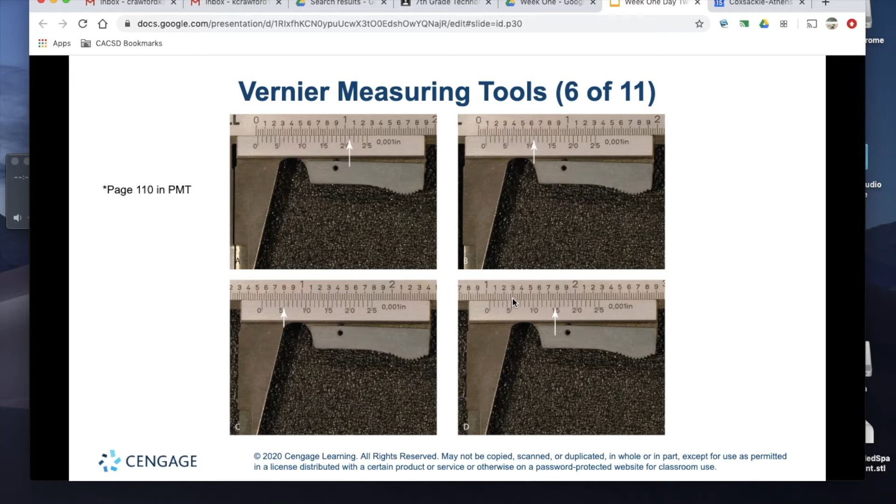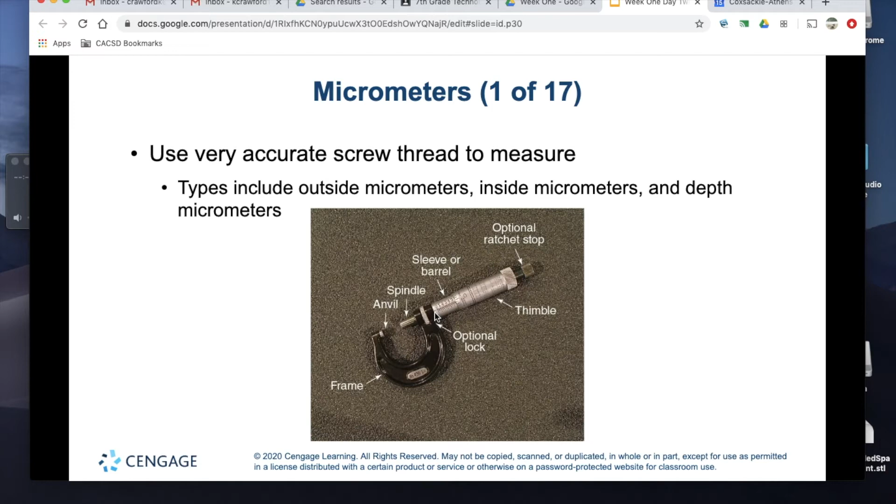We have several different sizes of micrometers, everything from 0 to 1 inch, all the way up to 6 to 12 inches.

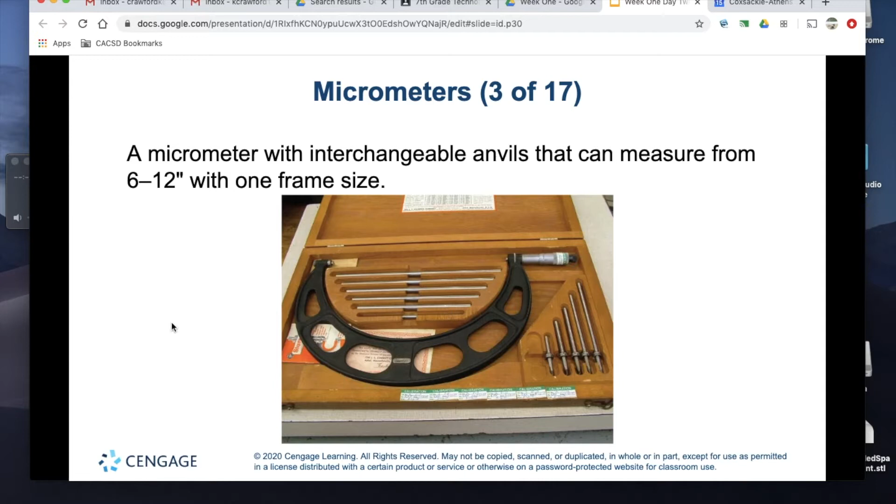Now, taking a look at how we measure with a micrometer, what we're going to do first is find everything before that edge of the thimble. That leading edge of the thimble, we're going to take a look at all the numbers that occur before that. So in this case, it appears that we have 0, 1, 200 thousandths showing on the barrel.

And then we're going to go down similarly as we looked at the vernier scale. We have 25 thousandths increments. So it looks like we have 25, 50, 75 thousandths showing before the thimble. So we have 275 thousandths so far.

And then the next thing that we're going to do is take a look at the thimble and find the line on the thimble that best lines up with the center line on the barrel. In this case, it looks to be about 10 thousandths. So we have 285 thousandths.

Now, in this case, on this micrometer example, we also have a vernier scale that is up above that main scale. And in this case, we have 8 ten-thousandths showing. So we have 285 and 8 tenths as our measurement.

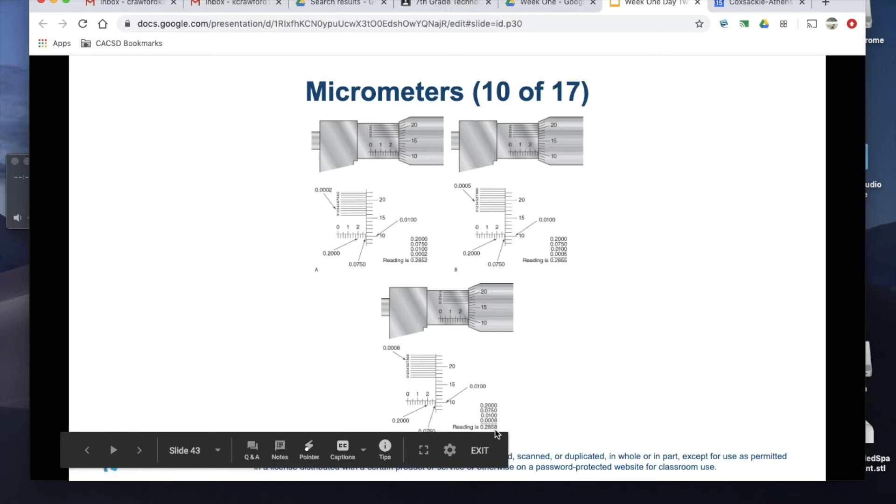Moving ahead, different types of micrometers, and moving to dial calipers. So we took a look at the vernier scale. Now we have dial calipers. Again, we're going to be looking for everything that occurs before the sliding jaw of the caliper.

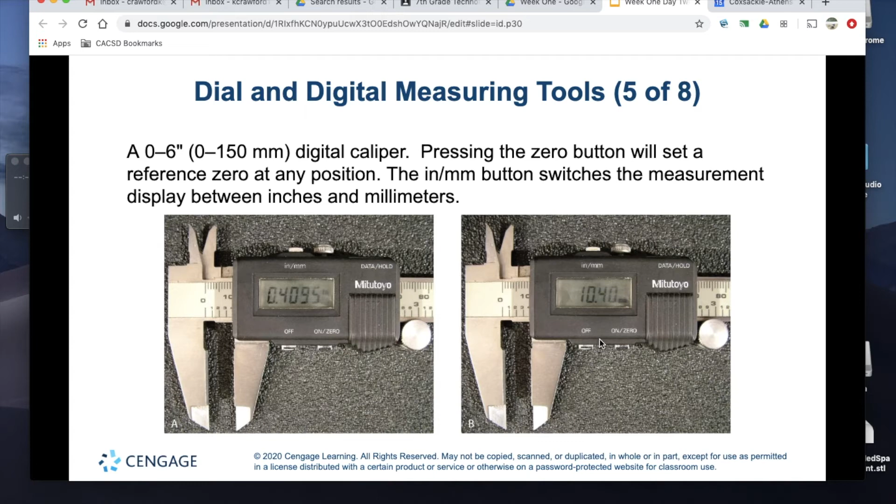Digital calipers, pretty straightforward and easy. The nice thing about digital is you can swap back and forth between inches and millimeters, and they're obviously much quicker to measure with. Dial and digital height gauges, depth gauges.

Then we have some transfer tools, some precision transfer tools. Now, the advantage of these is that we can get to different features that a micrometer or a caliper can't, but they do not have graduated scales on them, so they're just a transfer or a reference tool.

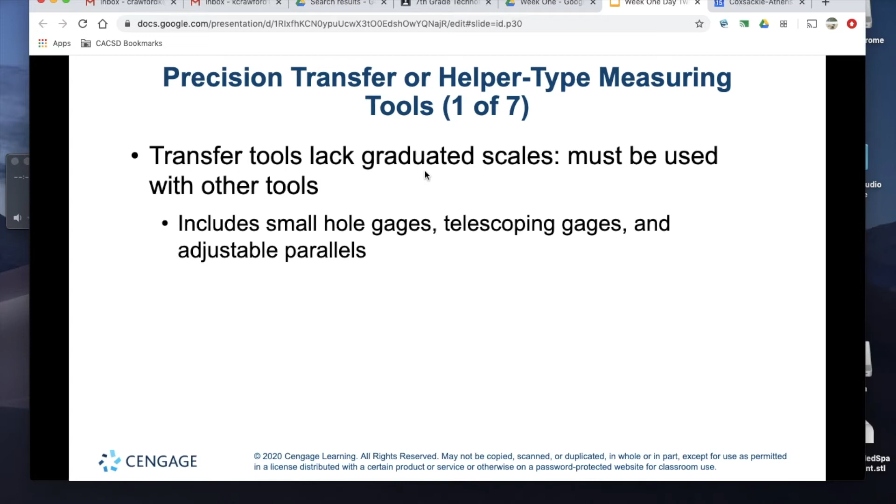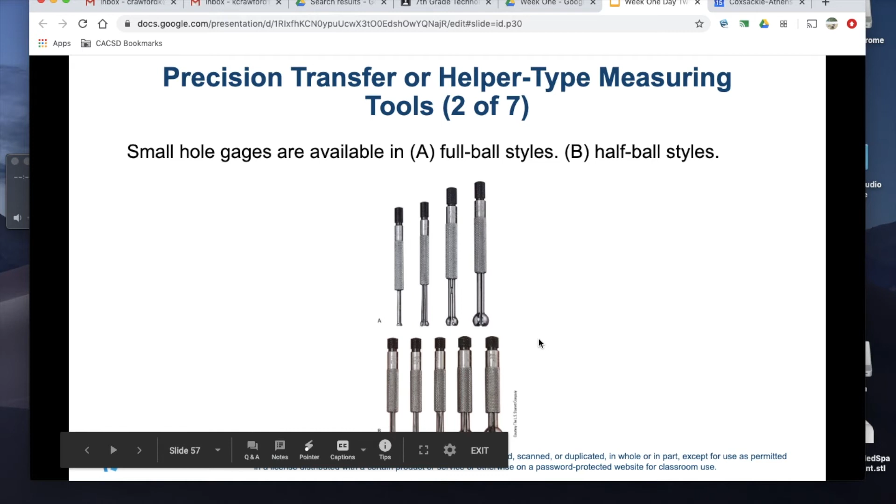So if we take a look at a couple different types here, we have full ball and half ball style gauges. These are for measuring hole diameters.

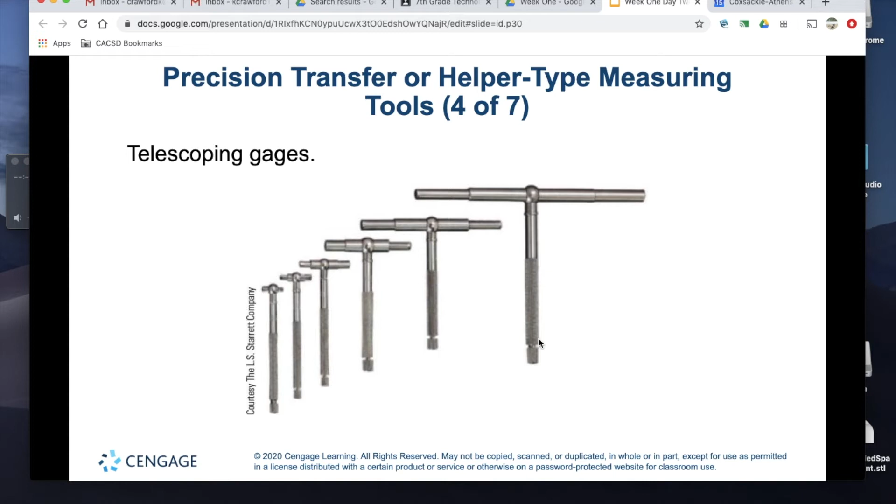We also have telescoping gauges, which most of you should be familiar with. Now, the process of measuring with a telescoping gauge is pretty straightforward.

We're going to insert the telescoping gauge into the hole at a slight angle with the thumb screw slightly tight. We're going to rotate that handle downward, collapsing the gauge in on itself. We're going to tighten the thumb screw of the gauge completely, and then rotate the telescoping gauge and pull it out and measure that gauge with a micrometer.

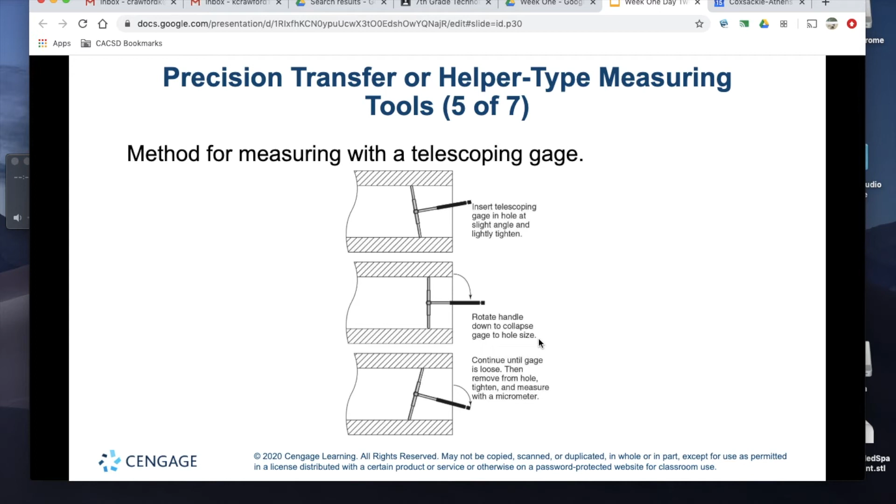Now, take note of how this person is holding on to the micrometer and the telescoping gauge. You gotta have a little bit of dexterity here, but holding the micrometer and the telescoping gauge in this manner allows you to move the thimble, hold on to the telescoping gauge, and hold on to the frame of the micrometer.

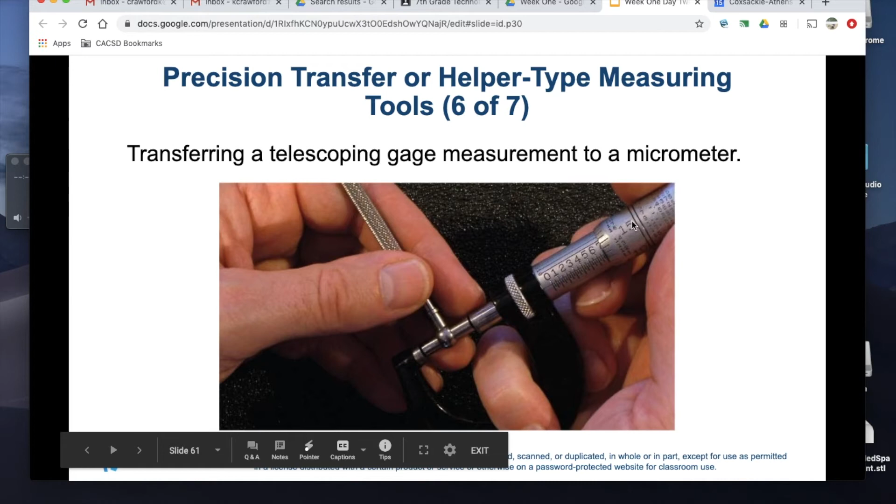Moving ahead here, we have dial and digital indicators coming in two different styles, with a plunge style and a test indicator.

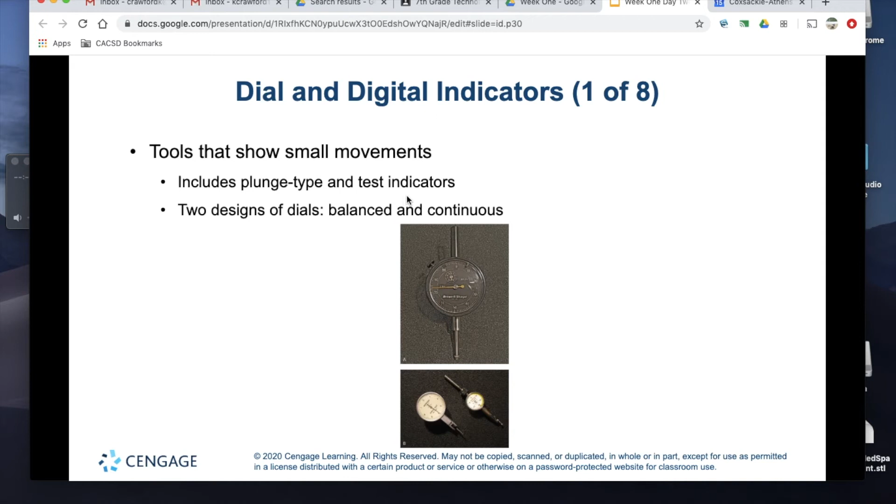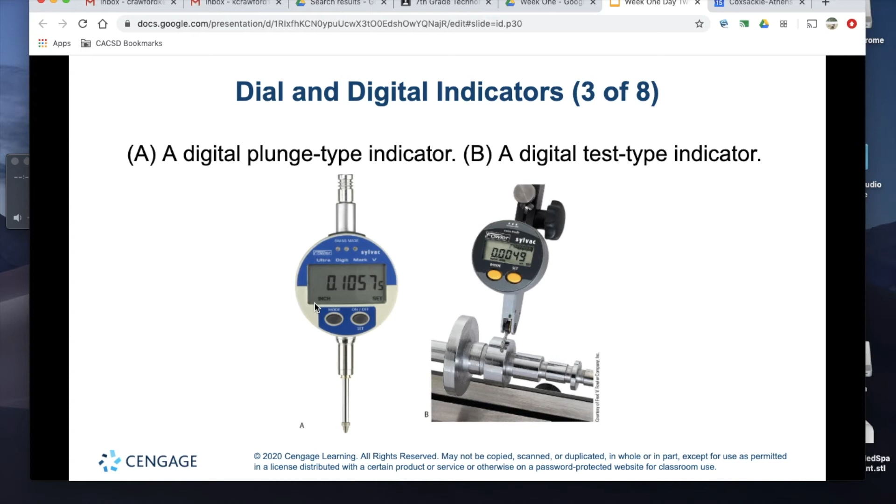Note in this diagram the correct way to set up a test indicator. Note that we have a little bit of preload on the end of the indicator, putting a little bit of pressure on that needle so it's not perfectly vertical.

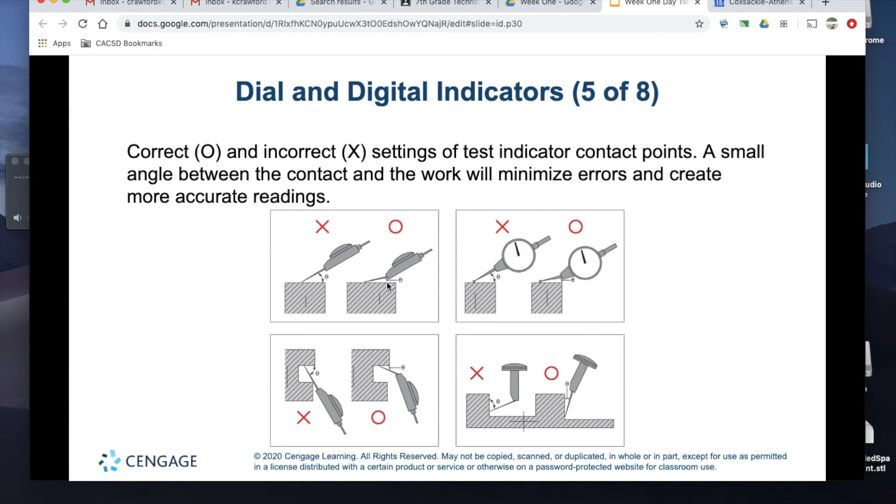We can use dial indicators as a reference. So in picture A, we're using a gauge block stack up to zero out the indicator, and then we can slide our part underneath to see how far out of spec that part might be.

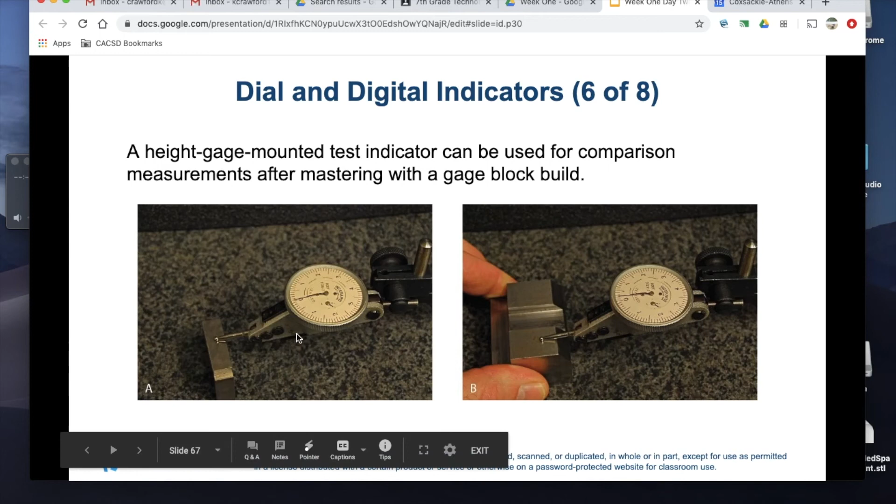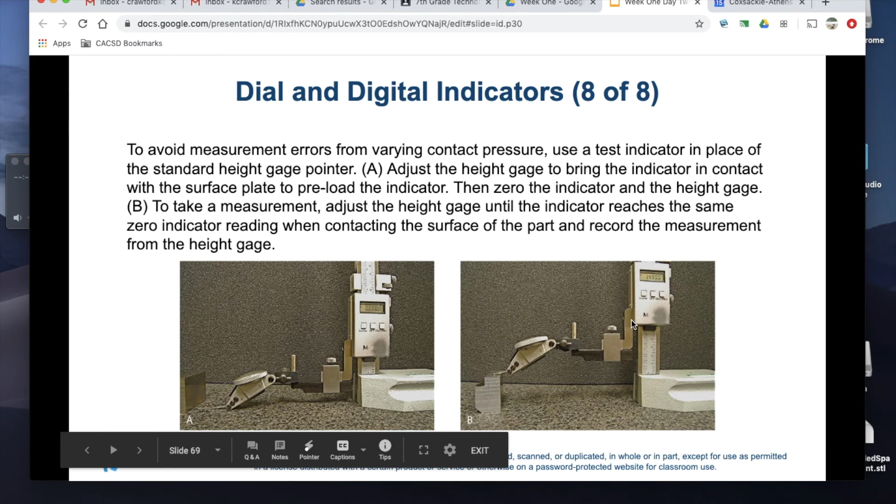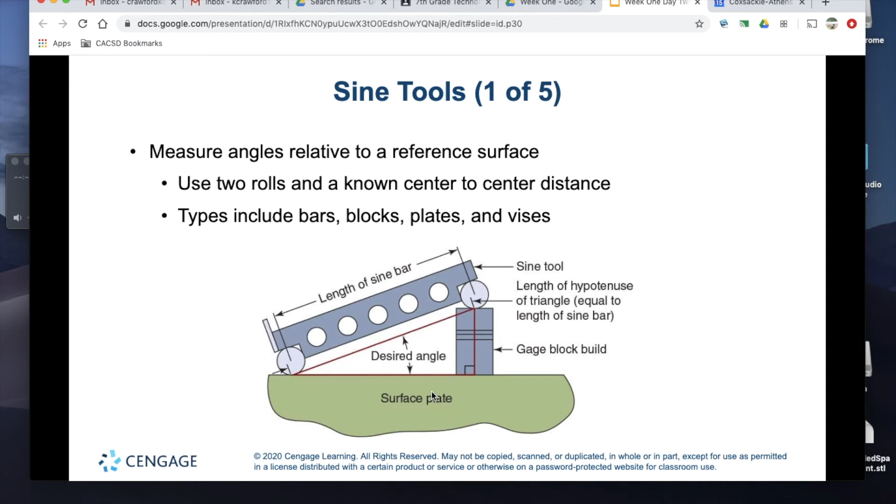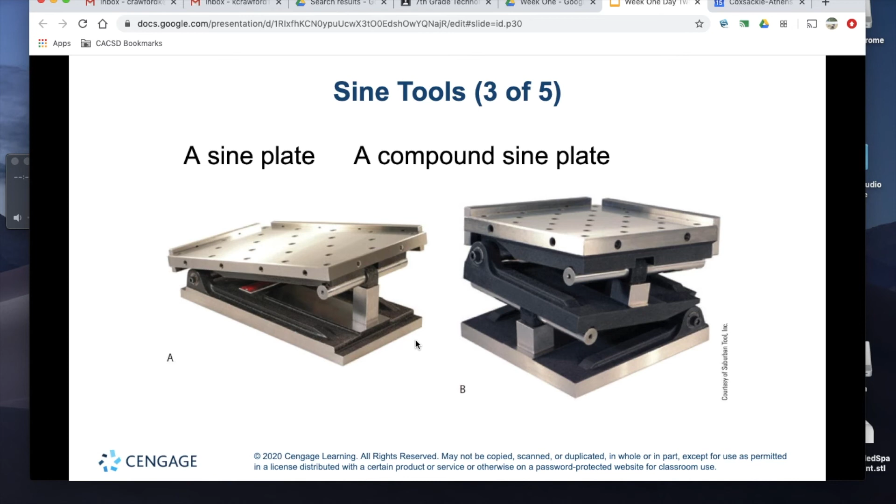Sine bars and sine blocks. A sine block, obviously, is just a little bit wider, accommodates for a little wider part. Same thing with a sine plate and a sine vise.

As you can see, we have a part that has an angle on it. We can match that angle with the sine plate or the sine bar and run an indicator across the top, making sure that that surface is parallel with the surface plate, and confirming whether that part is within tolerance or not.

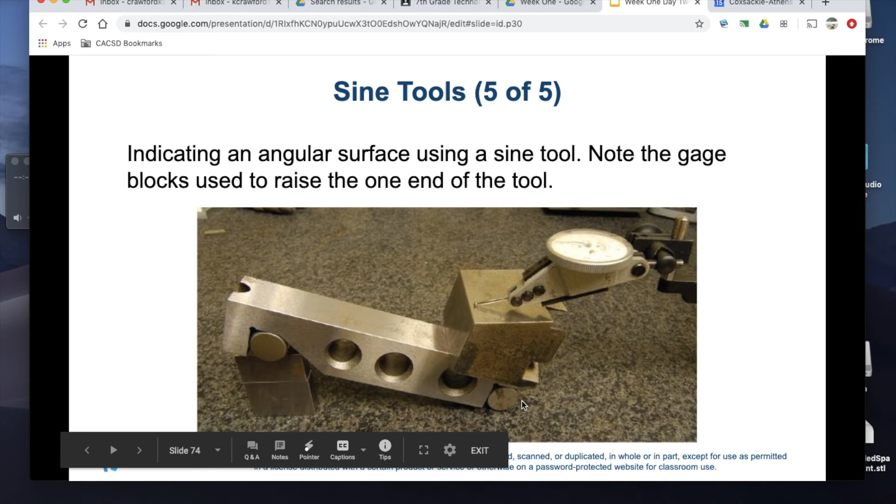Surface finish, essentially the average of the peaks and valleys left by a machining operation, typically measured in RA. We can measure them either with a comparator or a profilometer. We'll see examples of both in just a second.

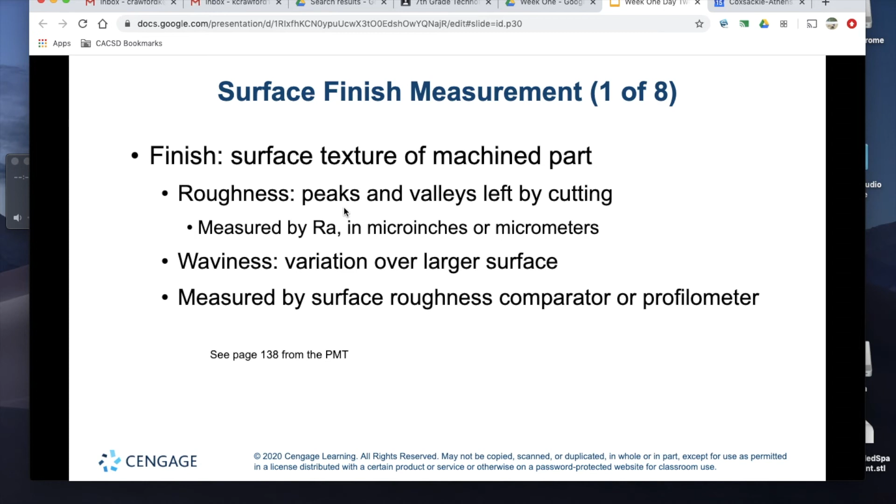We can see that roughness is a little bit shorter of a distance versus waviness, which is a little longer surface area.

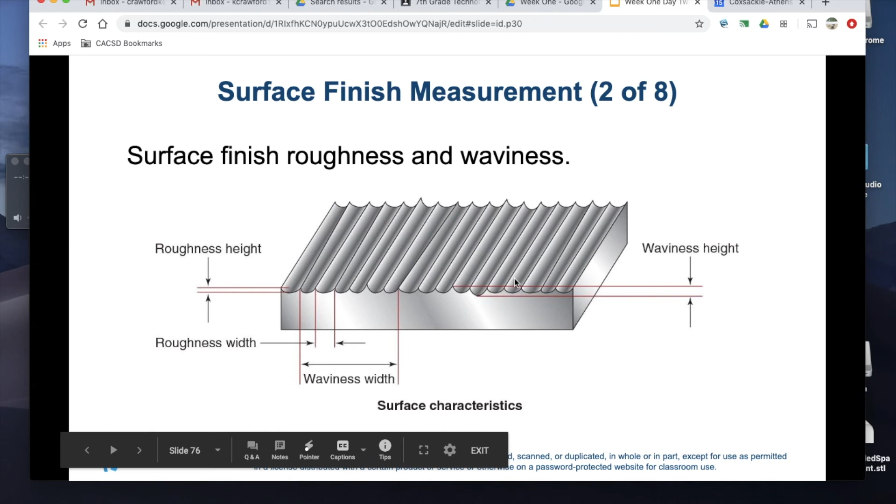Again, RA, surface finish, is just the average surface height above the mean line over a given length. So we're just taking the average, essentially, of the peaks and valleys.

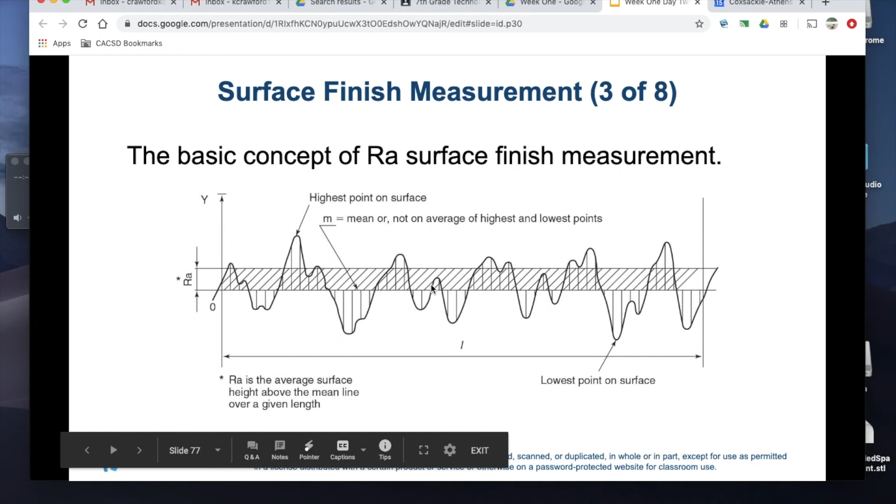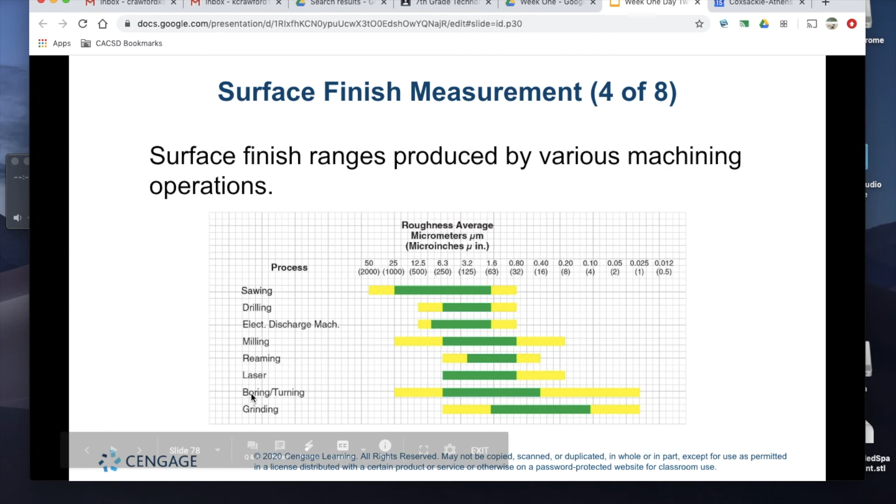Here's a diagram showing some different RA finishes that we might be able to get from different machining and manufacturing operations.

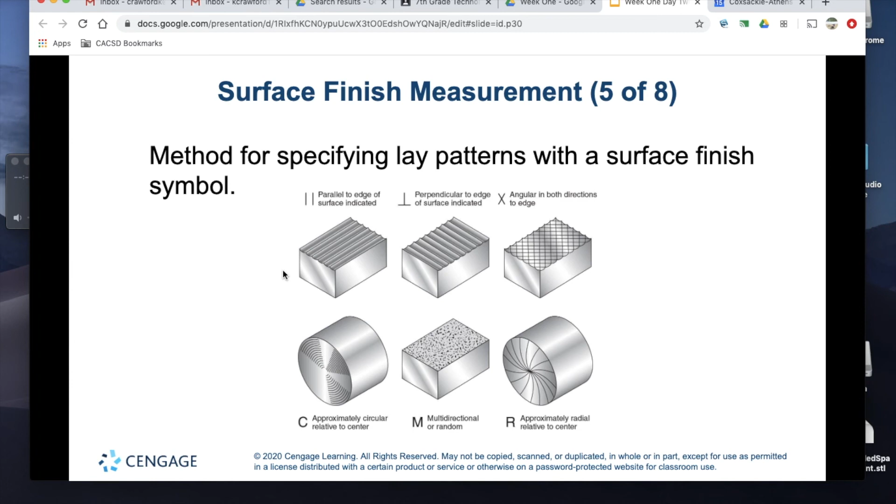What you might find on a technical drawing at a manufacturing facility or a machine shop is this symbol accompanied with a number call out for RA surface finish.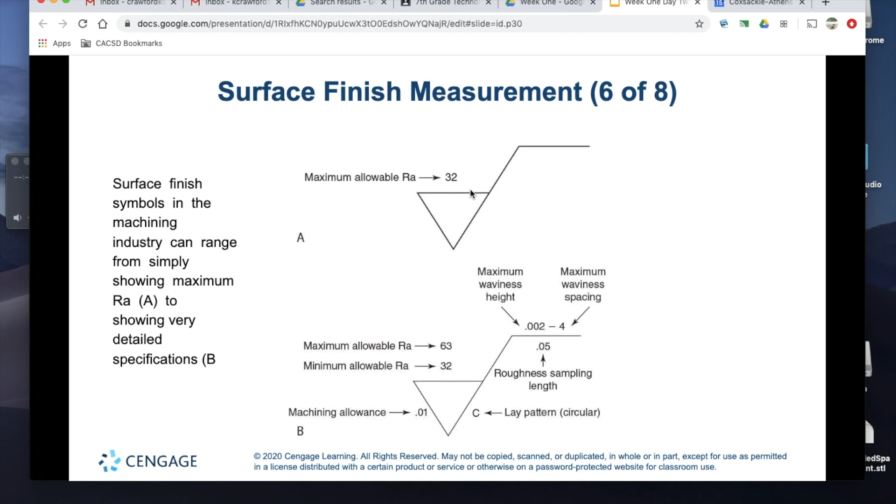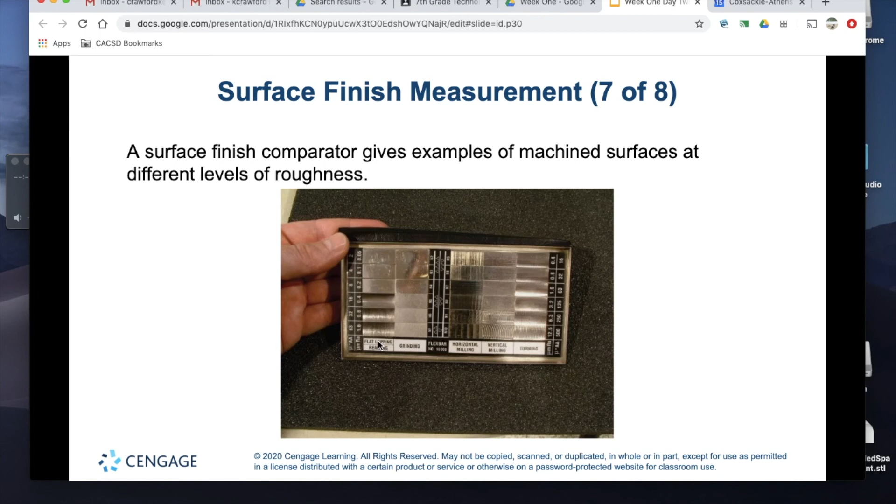Here you can see a surface finish comparator. It just gives us a rough idea of what different machining operations produce in the patterns that they produce and the RA finishes that are accompanied with those patterns. It's just a comparison. We can take our part and compare it to it.

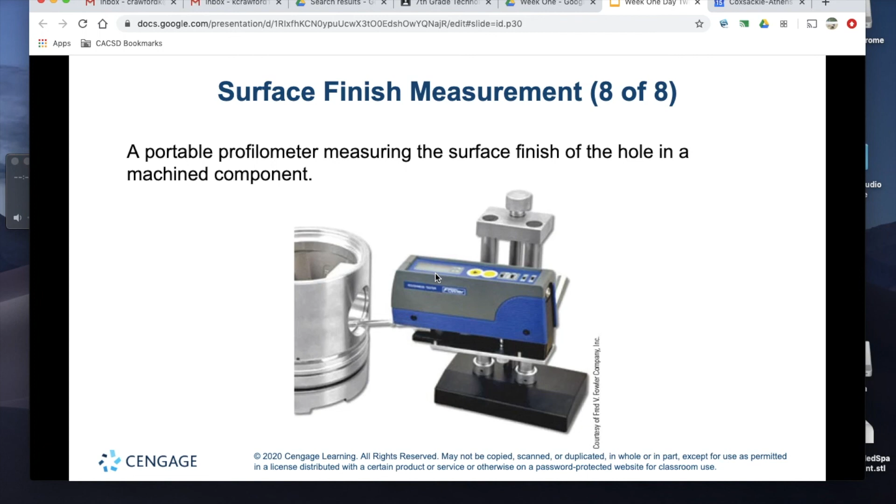What is more beneficial is using a profilometer, which is a digital readout device that will take the average surface height of those peaks and valleys and give us an RA finish on the digital display.

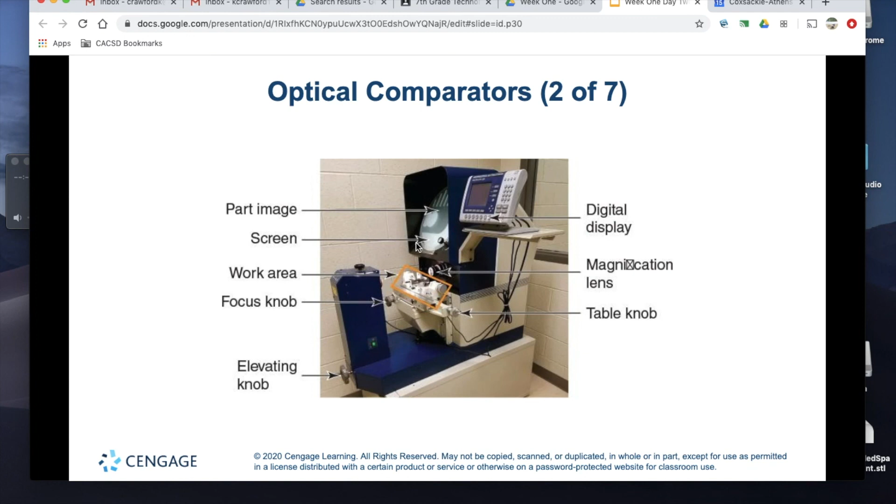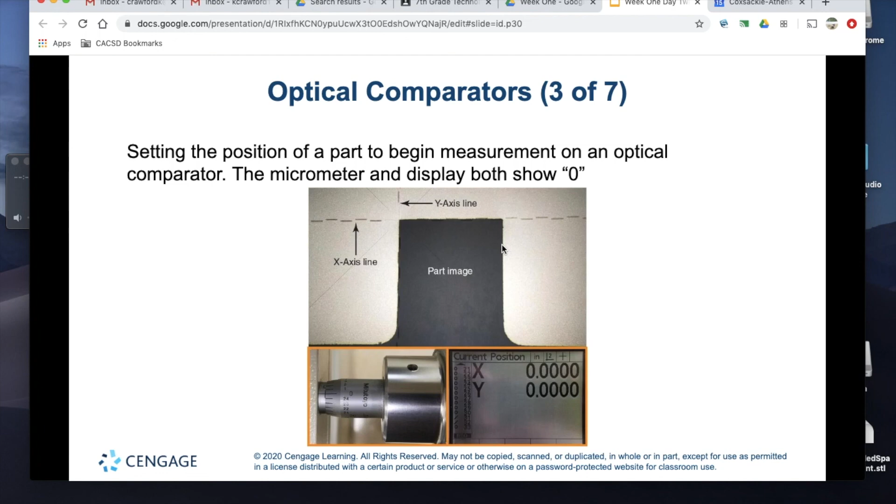Another type of optical comparator for measuring different features of a part. Essentially, it's going to be just a big magnifying glass or microscope that's going to lay the shadow of our part, and we're going to be able to measure from point to point with a precision measuring device on that optical comparator to tell the distances and angles of different features of our part.

And possibly the most accurate machine for precision measurement is a CMM, or a coordinate measuring machine. It's a pre-programmed, essentially a CNC machine with a probe on the end of the spindle, and we pre-program it to pick up on certain points of a machine part to measure that item, and it'll give us some data output that will tell us whether our part is within tolerance or not.